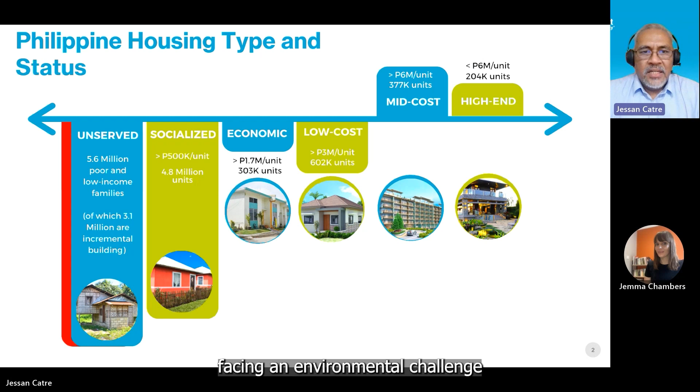We are also facing an environmental challenge in the housing market because in the Philippines there is a big segment of the population in the informal sector who are incrementally building their houses. There are roughly more than 3 million families doing so. Unfortunately, the technology they are using in building up or improving their homes is wasteful and inefficient. As such, there's a huge waste of materials in this segment of the market.

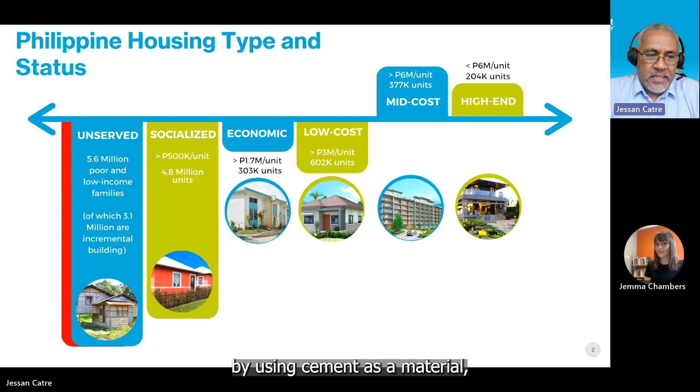Filipinos prefer to build using cement as a material. We all know that the production of cement and the transition towards and production of concrete is one of those industries that contribute to increasing greenhouse gases. So in this segment of the population, more cement is being utilized inefficiently, thus contributing more of this harmful material.

The next slide shows how poor and low income families incrementally build their homes, and you will see that the design, the material, and the workmanship are suboptimal. There is a lot of inefficiency and wastage. This population of the Philippines is mostly in the poor and low income segment, and they are the ones who consume plastic packaged materials the most.

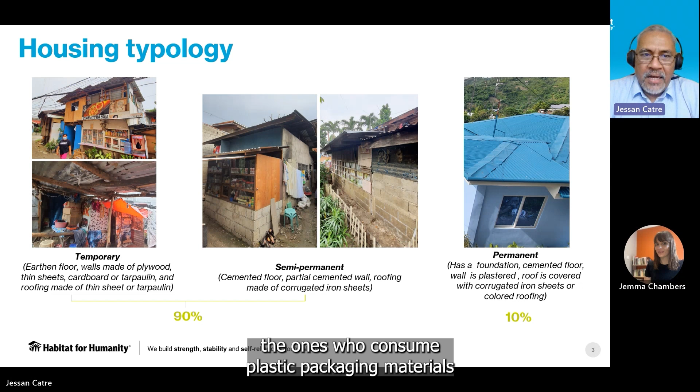What are we doing in Habitat to contribute to solving these twin challenges? Through our work in our market systems development approach, we have partnered with businesses who have embraced the circular economy model. In the Philippines, we found Green Antz as one of those early businesses, a startup introducing a circular economy model. Green Antz won our Asia Pacific Housing Forum Innovation Award in 2019 with this particular model of utilizing recycled plastic into construction material.

So you will see in their model that they have found the solution in terms of reusing and recycling plastic, then making them productive again by utilizing them to reduce the deficit in the housing sector. So what we have done in Habitat is partnered with Green Antz in terms of introducing a block which is more appropriate for low-income households when they incrementally build their homes.

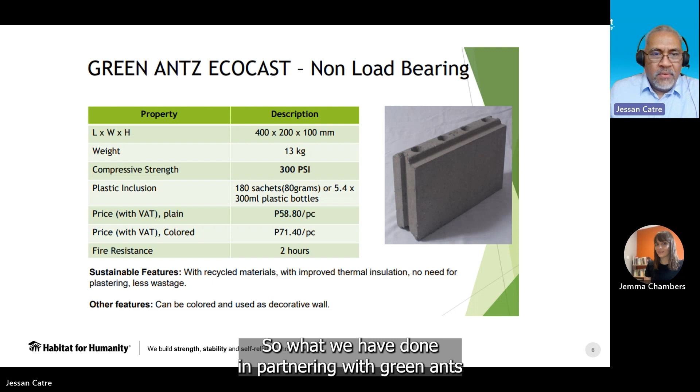The product is stronger, cooler, and faster to install, and as a bonus, it embeds recycled plastic as additives. What we have done in partnering with Green Antz is set a model in the housing industry and in the recycling business to ensure this quality product is available to low income and poor consumers in the Philippines by making sure they are accessible in retail hardware stores in Central Visayas and eventually in the whole of the Philippines.

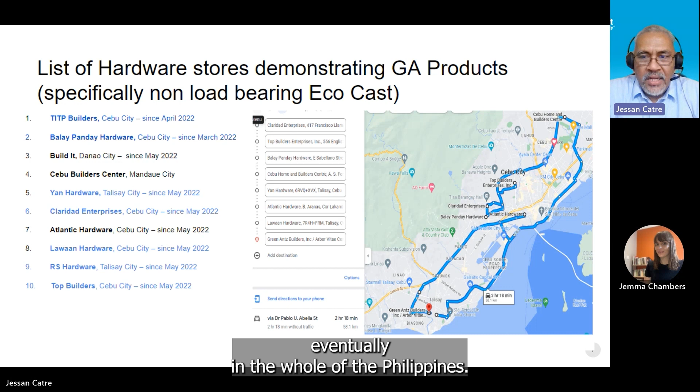Green Antz' model is called Eco Hub, wherein communities pick plastics in their area and then turn them into construction materials, and market these materials in hardware stores and other distribution points.

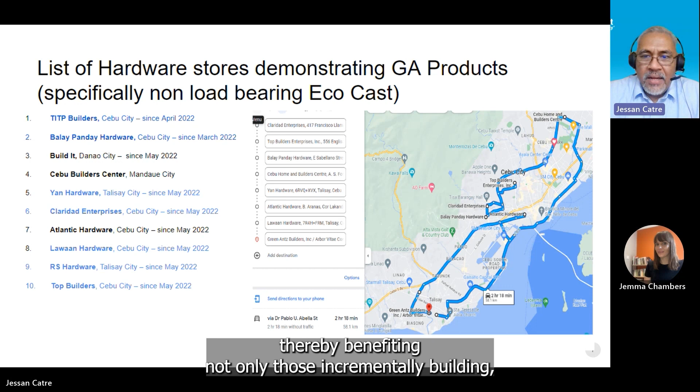With this type of work in partnership with us in Habitat, we have made sure that recycled materials, recycled plastics, are utilized into construction material to be used by low-income homeowners. We have also found out that with the availability of these materials, low-income developers have also adopted this material, thereby benefiting not only those incrementally building, but also those houses being built by social developers.

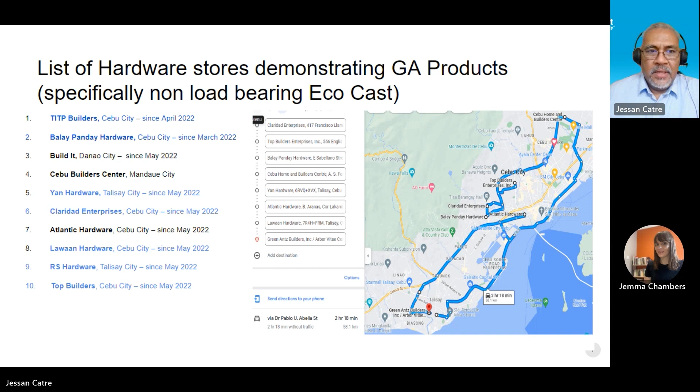This year, the Philippine government has started implementing the Extended Producers Responsibility Law, and this is the first year of its implementation, wherein fast-moving consumer goods companies and other plastic producers are required to collect back their plastic.

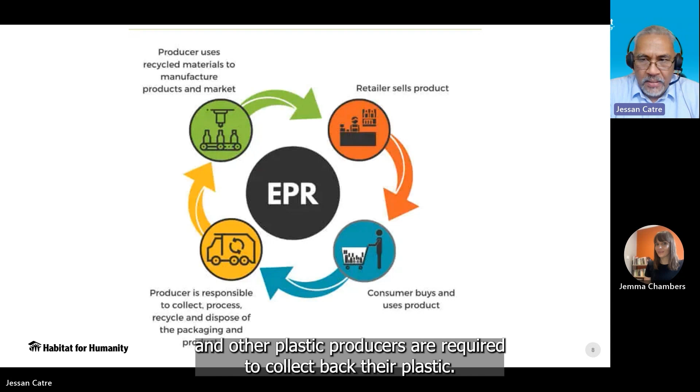What we are doing in partnership with the academe, with the industry association, and with Green Ants, is we have launched research wherein we would like to see the business viability of utilizing plastic credits and using them as housing subsidy and construction material subsidy.

Over the course of the following six months, we will be reaching out to fast-moving consumer goods companies, government entities, developers, and retail distributors to find out if this is a viable model, and if so, whether it is scalable not only in the Philippines but other countries in Asia where EPR law and housing deficits are pressing.

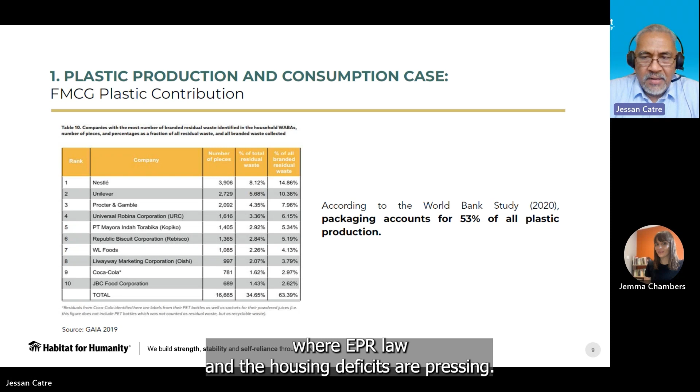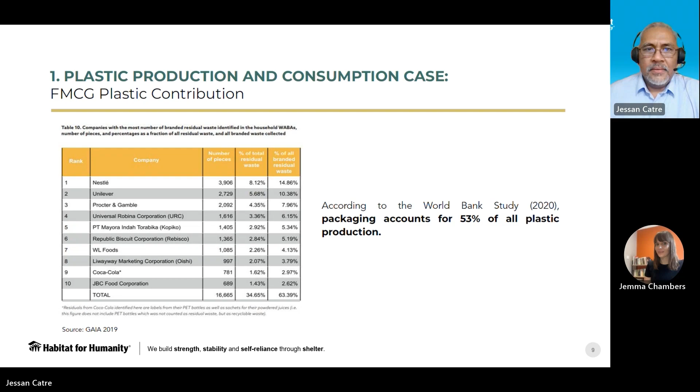Thank you, Jessan, that was great, it was great to hear more about the project. I was wondering if you could tell me a little bit more about the partnership with Green Ants and the way in which Habitat is working with them as a social enterprise.

So at Habitat's Asia Pacific Housing Forum in 2019, we invited innovators in the field to introduce their business models, and Green Ants was one of them, and they were eventually awarded the innovation award that year. Afterwards, Green Ants partnered with us in Habitat to make sure their products are available in a new market for them, which are the incremental, low-income incremental builders in the country, roughly more than 3 million households.

This was born out of the research we conducted in Habitat, wherein we wanted to spotlight the other housing actors in the market, specifically those doing incremental builds. So we worked with them in basically expanding their business model to be more inclusive.

So from there, we said, Gemma, you have products which are targeted towards big construction projects, big buildings. Can you redesign this to be more appropriate to houses being built by low-income clients? And that's why they introduced this non-load-bearing Eco Block. We also assisted them in making sure these are marketed appropriately by targeting a new market and making this available in several hardware stores.

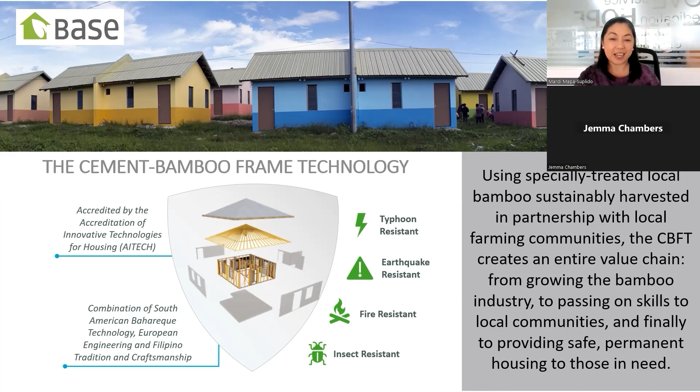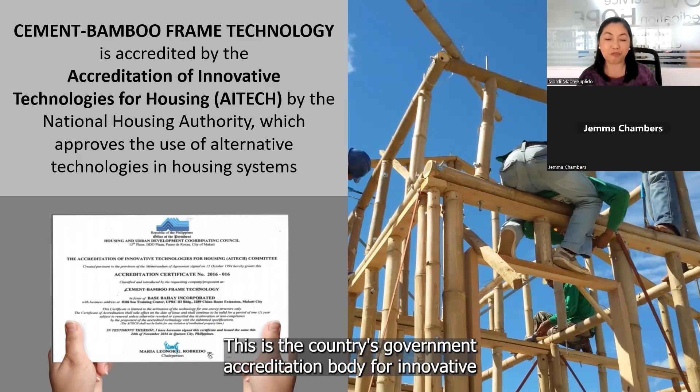The use of CBF for house construction has been accredited by AITECH, the country's government accreditation body for innovative housing technologies, and we're able to use that in our housing project. This environmentally friendly house construction design is able to provide sustainable harvesting and income also to bamboo growers. For those familiar, bamboo has a strong root network that enables soil stabilization and water tables rise.

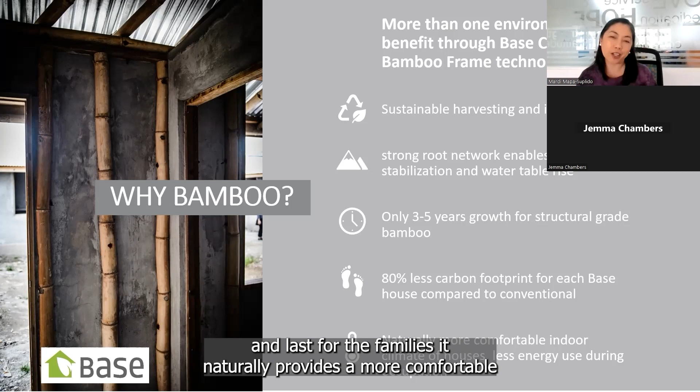Unlike trees, bamboo grows easily, faster, and is easy to propagate. It only requires 3 to 5 years for it to mature, for us to have structural grade bamboo. Plus, the CBF technology has 80% less carbon footprint compared to conventional house design. And lastly, for the families, it naturally provides a more comfortable indoor climate, resulting in less energy use.

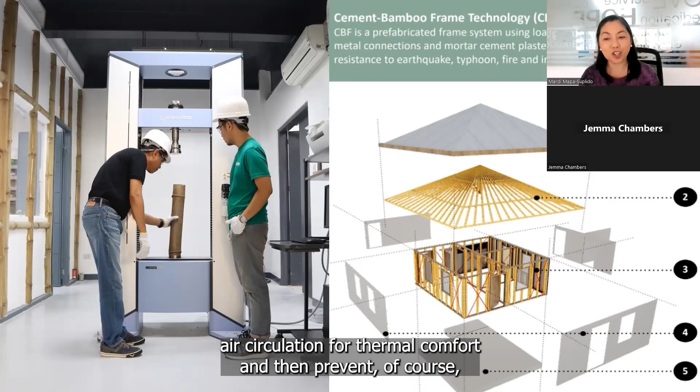Here in this slide, we're showing the different parts of a CBF home. You will see where we use GI sheets for the roof, to allow air circulation for thermal comfort, and prevent water from entering the house. For the roof framing, that's number 2, we use treated bamboo reinforced by bolts and nuts, engineered depending on the wind zone of the area where we build a home.

Third is the bamboo frame, that's the frame and the shear walls. They are prefabricated with connections between the bamboo poles to withstand the impact of earthquakes and typhoons. Fourth is the use of a steel wire mesh, put around the bamboo poles, with a finishing using cement to reinforce the bamboo and protect the structure from exposure to long-term harmful natural elements. The last is concrete flooring made with solid concrete designed to elevate the house and prevent flood water from seeping in.

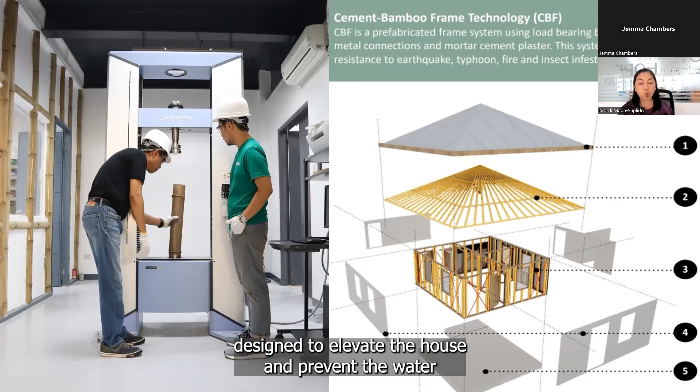In this next slide, I'll show a few more photos of how bamboo is used during the house construction process. We have the wall panel using bamboo, assembled in a fabrication area and then installed after the house foundation is built. Then we have the panels wrapped by a wire mesh with cement cladding applied, and finally the roofing structure, also made from bamboo and covered by roofing sheets.

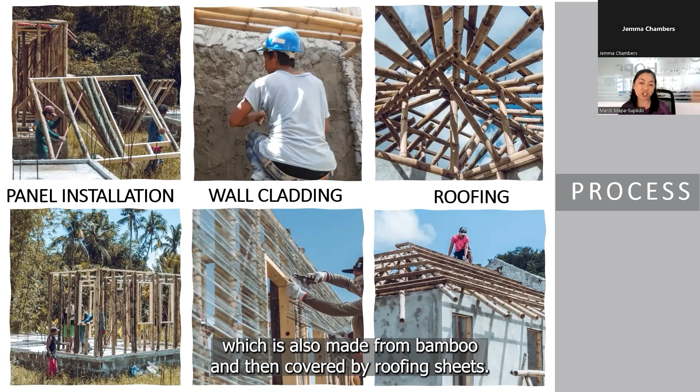Since we've started the NOI 25 project, so far we've been able to build 382 houses, with 42 being built now. And we've been able to open more sites where we hope to build another 1,200 more houses this year and next year.

More importantly, I think it's the feedback we've received from the families, those who've experienced disasters the past 2 years said their houses were not damaged. 86% said they were happily satisfied with their homes, as most of these met their housing needs. And 76% said their home provided better access to water and electricity and were happy with the house design and the layout.

You'll see here in the next 3 slides one of the communities in Silay City, where we've been able to build 346 houses. The next slide is in San Carlos, and this photo was just taken 2 weeks ago, where we were able to turn over another 60 houses to the happy homeowners that you see in the photo.

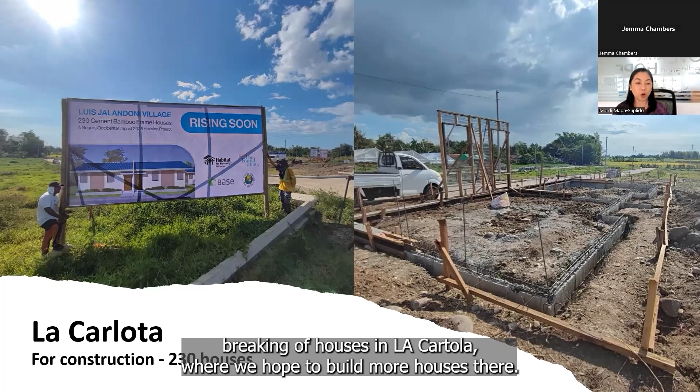This third slide is from last week where we started with a groundbreaking of houses in La Carlota, where we hope to build more houses there. In the next 2 years, this project envisions supporting another 1,200 families to be resettled in our NOI 25 communities and have a home they can call their own.

Although the majority of the funding required will come from developers' compliance of real estate companies in the Philippines, we still need around 1,467 British pounds per house to complete house construction and support community development activities. With the 1,200 housing units we target to build, we're still in need to raise a bit over 1.5 million pounds, so we hope for your support to help enable informal settler families to live in dignified and resilient homes with access to basic social services and secured tenure.

With a contribution of 1,467 British pounds, you will be able to help one family have a disaster resilient, environmentally friendly cement bamboo frame home. So thank you very much, Jemma.

Thank you, Mardi. It's wonderful to hear so much about the project. We'll be sharing information in a moment about how you can support it, but I wondered if I could ask a quick question. It's really interesting to see how constructing new homes, which is so needed, can also have a significant environmental impact - this is mitigating that and contributing positively. How does the project involve local bamboo farmers and integrate them so they're able to benefit from it?